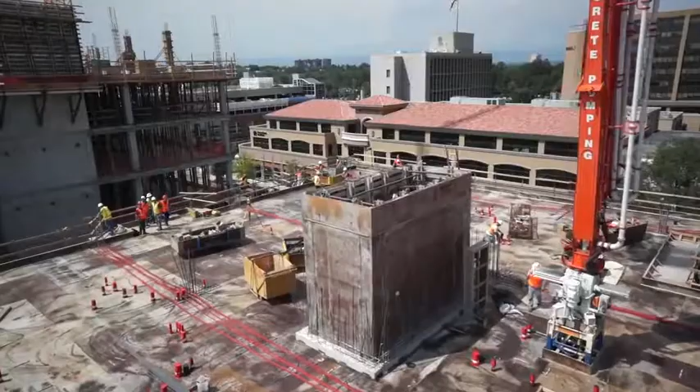Construction costs will always be of prime concern to builders. As a construction project moves through its inevitable design modifications, cost estimators must rapidly generate material takeoffs to maintain accurate project budgets and better evaluate design alternative costs. Failure to do so risks reduced profits on projects that exceed budgets.

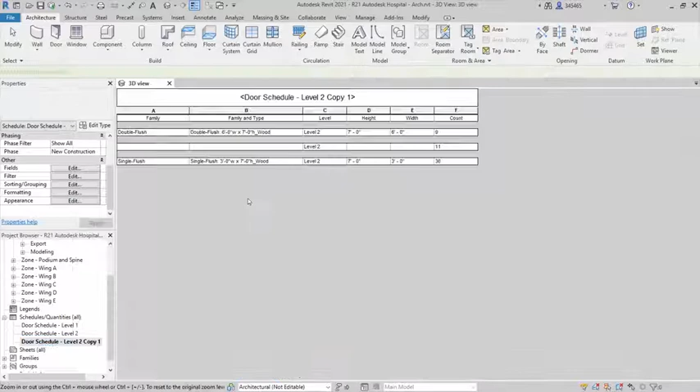Today's estimating processes rely heavily on 2D documentation and manual counting of project elements and components, which can be error-prone and very time-consuming. Leveraging a model-based workflow for quantification can reduce the time it takes to generate project quantities and enables workflows for adding valuable construction information to project elements during the process.

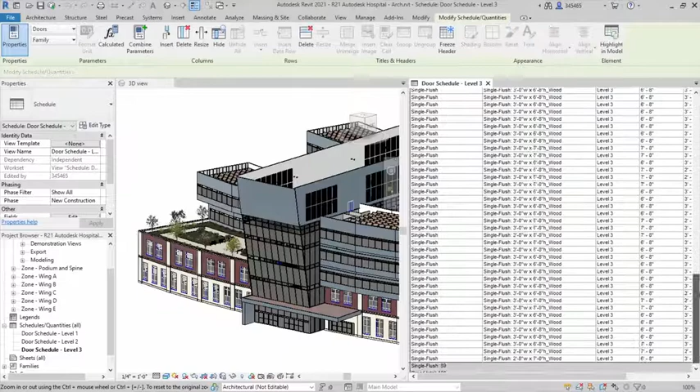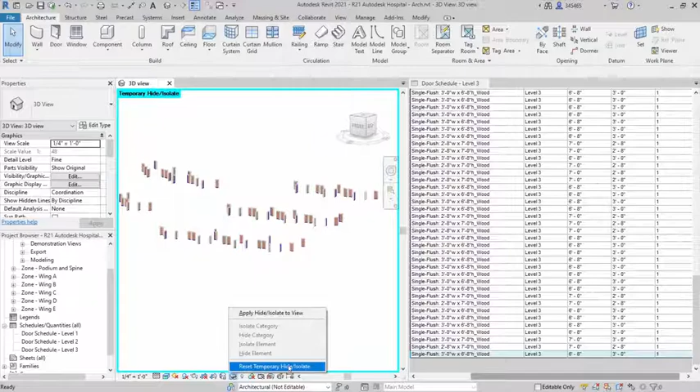Here we see how the Autodesk Construction Solutions offer several ways to gain access to quantity information early in the planning process. By leveraging tools directly from the modeling applications, we can quickly get a high-level understanding of the project quantities. Schedules or tables of data built from the 2D or 3D model, created by the designer, can be used by adding counts and totals, or a custom table can be generated on the fly to give you the feedback and quantities from the model information immediately.

Here we are working with item and resource catalog information in order to classify the model elements further than the model authoring tools can. With the catalogs available, we quantify the model using intuitive tools in Navisworks.

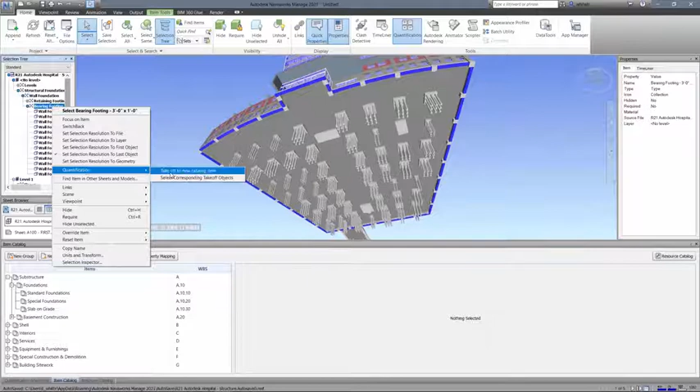The quantification workbook is our central location to create and manage the quantities within our model. We simply select an appropriate item within the catalog for quantification and can either drag and drop elements from the model to the appropriate items, right-click on any model element and select the catalog item to use, or use a toolbar to quantify the elements on the fly.

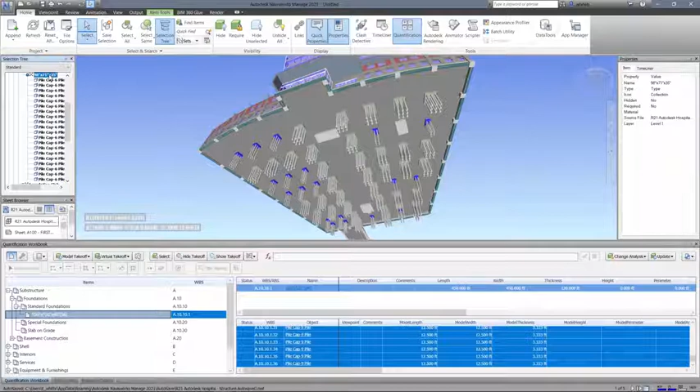Once elements from the model are quantified, their display in the model is updated with the color and transparency settings from the catalog. This ensures that we see exactly what has been quantified and can quickly toggle between showing the model elements that are done versus the elements that aren't.

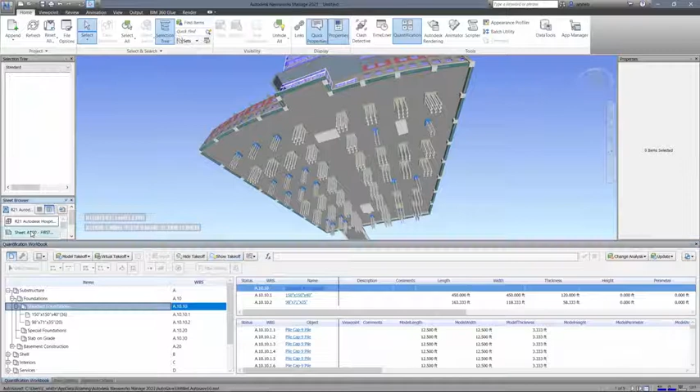The workbook also leverages the item breakdown structures and the resource breakdown structures. In that, we can see a roll-up of the total quantities for an item collection with its resources, as well as the individual elements' detailed data.

To complete the quantification of the model, we simply continue to walk through the workbook and pull model quantities into the system. A similar workflow can also be used to do 2D takeoff in Navisworks with new, easy-to-use and intuitive tools.

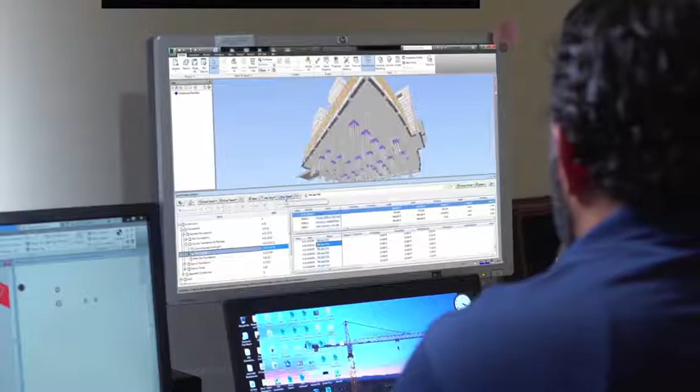With the Autodesk AEC collection, including Autodesk Revit and Autodesk Navisworks, you can use the latest technology to provide drawing, viewing, quantification, and markup capabilities, uniting design data and other vital information with an open and fluid environment. Cost estimators can keep up with even the most rapidly evolving material variables without missing a beat.